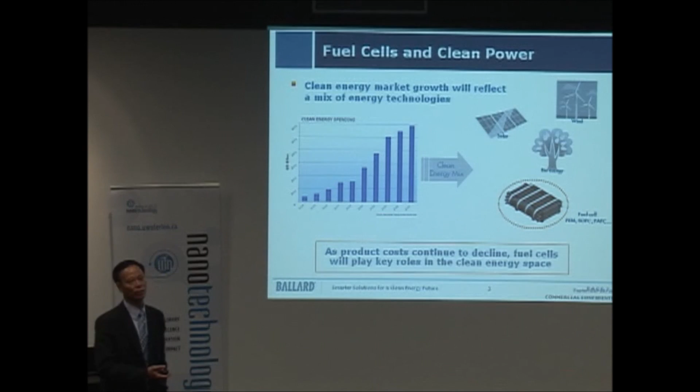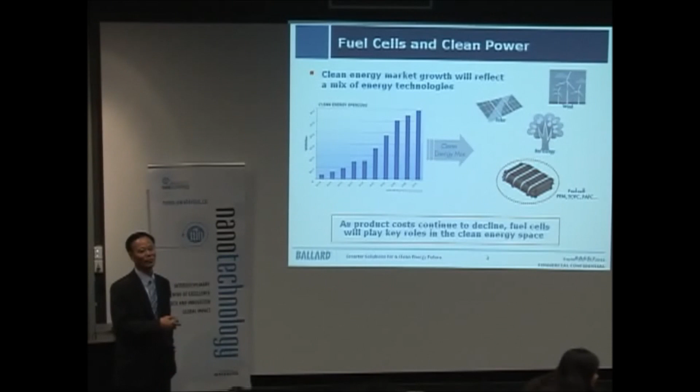Talking about fuel cells, we have to think about how that's directly linked to overall clean energy or clean power. We know the clean energy market has grown significantly, particularly in recent years. That's a mix between many different areas, not only fuel cells, but also solar, wind, bioenergy, and of course battery. We believe with continuous product cost reduction of fuel cells, fuel cells will play a more important role, or I should say a key role, in the clean energy space. The reason is because solar and wind energy will get an advantage from using fuel cells, and fuel cells will get an advantage from them to generate the hydrogen fuel we want to use.

So then, what is a fuel cell? This is mostly for those people who aren't familiar with fuel cells at all.

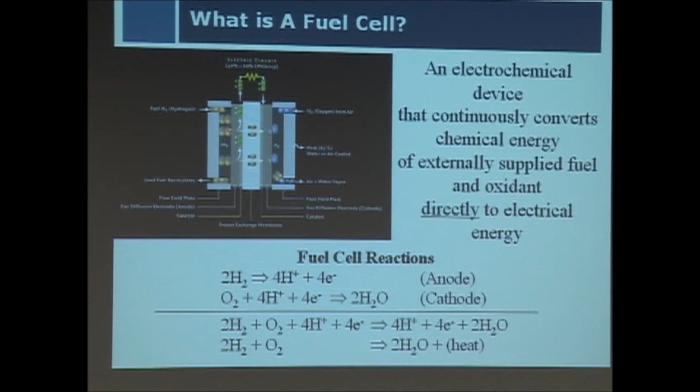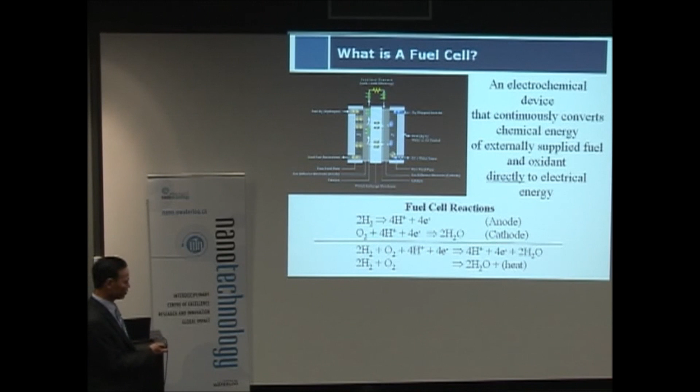Fuel cells are electrochemical devices that continuously convert chemical energy from an external supply of fuel and oxygen directly to electrical energy. They have two reactions: at the anode, hydrogen reacts with a catalyst to form protons and electrons, which go to the external circuit and react with oxygen, mostly from air, to form water. So the overall reaction is hydrogen plus oxygen generates water, heat, and electricity. There is no other side product that is not good for our environment.

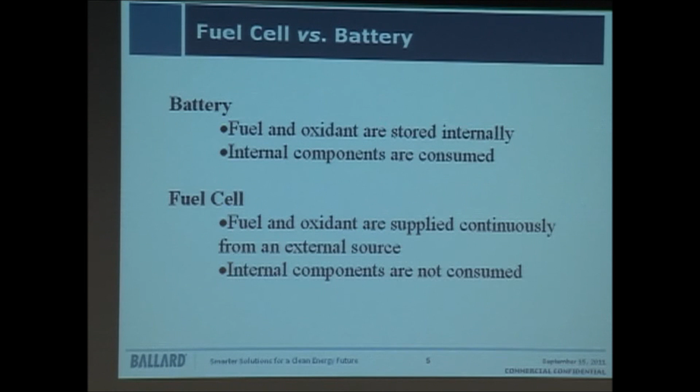I want to use this slide to compare fuel cells and batteries. For batteries, both fuel and oxidant are stored internally, and when you charge or discharge, the internal components get consumed and then restored when you charge again. However, for fuel cells, both the fuel and oxygen are supplied externally, so you can continue operating as long as you have enough hydrogen and air supply, and the internal components are not consumed at all.

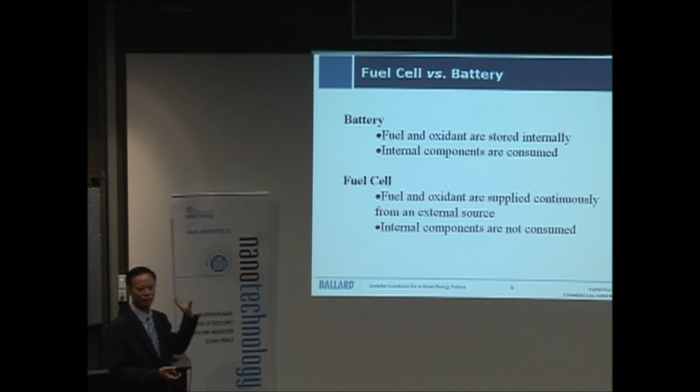Many people think fuel cells and batteries compete with each other, but I really think they are complementary, even including supercapacitors. These three electrochemical devices actually help each other in more ways than they compete. So from a technical point of view, we think these three devices are friends - they don't compete, they help each other.

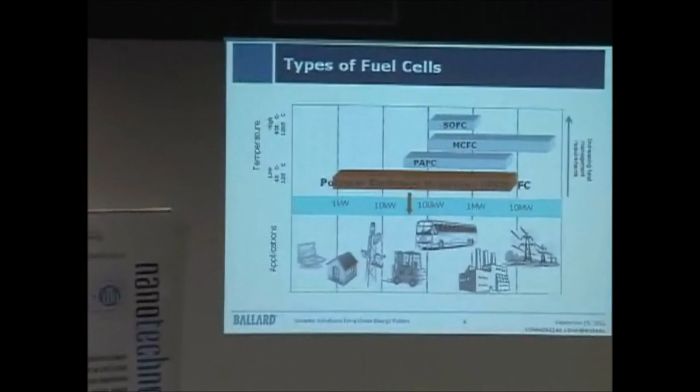There are many different types of fuel cells. At Ballard, we only work on proton exchange membrane, also called polymer electrolyte membrane, PEM fuel cells. This is different from solid oxide fuel cells, molten carbonate fuel cells, or phosphoric acid fuel cells. Another one not listed here is the alkaline fuel cell. PEM fuel cells can work across a wide power range, from sub-kilowatt up to megawatt range - from laptops or small house cogeneration, to telecommunication backup, forklifts, buses, and distributed energy generation.

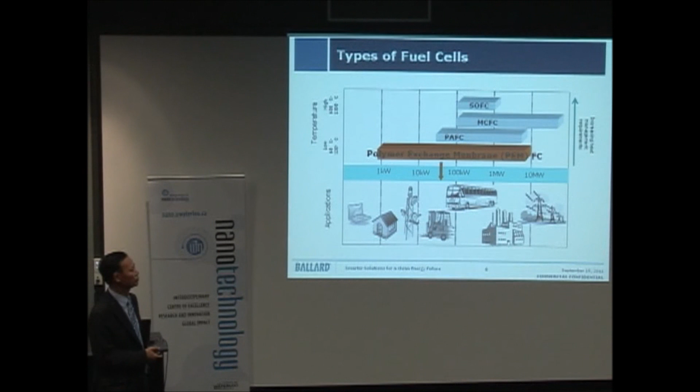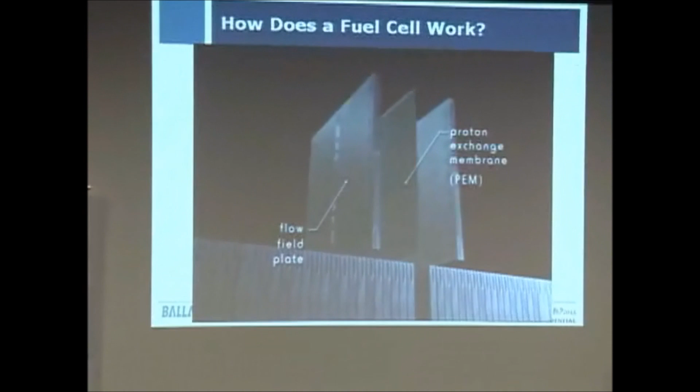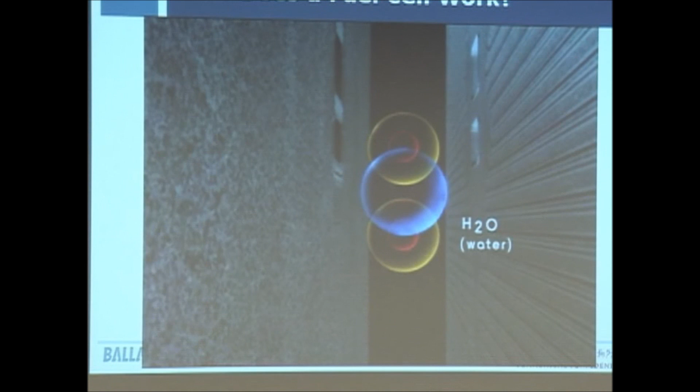I want to show how a fuel cell works. The fuel cell has flow fields on both the anode and cathode sides. Hydrogen, from either methane or natural gas reforming, comes in on the anode side and generates protons. The proton goes through the PEM membrane, and the electron is consumed by the external circuit, generating electricity, then flows back to the cathode side and reacts with oxygen from air. The proton also passes through the membrane, generating water as a byproduct.

To make the fuel cell work for different voltage requirements, you can build a fuel cell stack, basically stacking together many single cells. That's one of the key advantages of using a PEM fuel cell - depending on what power range you want, you can either change the number of cells or change the surface area of the electrode to get the power, current range, cell voltage, or stack voltage you want.

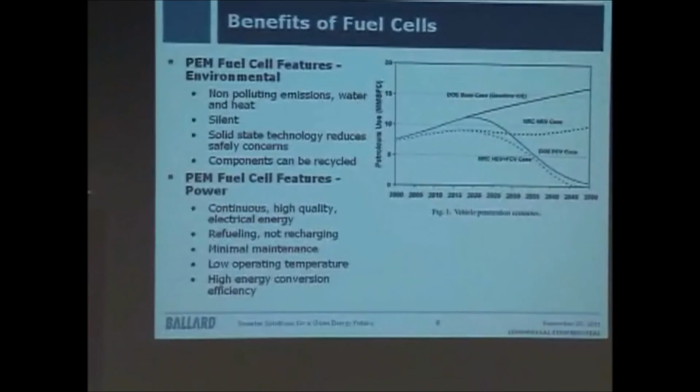So what's the benefit of fuel cells? We have to talk about vehicle penetration scenarios that people have predicted. Although many years of progress have continued to reduce greenhouse gas emissions from current cars, our population will continue to increase, so overall petroleum use will continue to increase. With continued improvement in fuel efficiency through vehicle emission control, it's never enough to even maintain or decrease fuel emissions or petroleum use.

With batteries, such as hybrid cars or others, you can stabilize things a little bit, but with continued population increase, it cannot be maintained or decreased anymore. So only the combination of fuel cell cars, or fuel cells hybridized with electric cars, gives you the opportunity to continue reducing the use of petroleum.

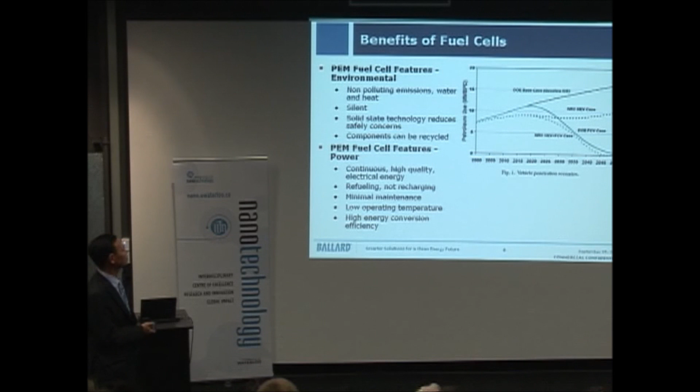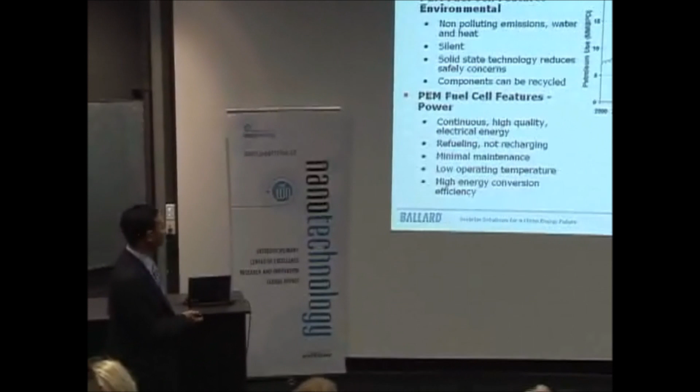That's extremely important for our future and future generations, because petroleum will continue to be consumed and will end up with nothing. So not only for that use, the environment benefit for pollution control and others also needs help by use of this fuel cell. So the fuel cell benefit is not only for environment benefit, it's also for our sustainable energy requirement.

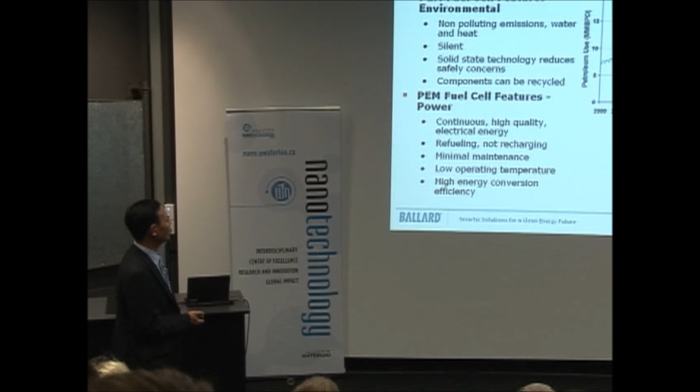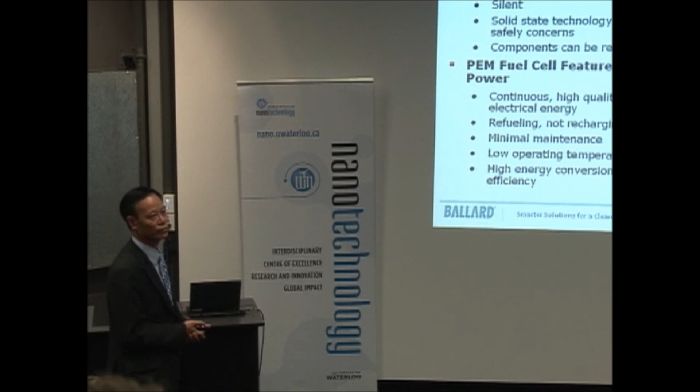And also in addition to that, there's a technical reason to use fuel cell. First of all is feature power, since we can continue to provide high quality electric power, and refuel when you need, like our current standard car uses gasoline, not necessarily recharging. We also need very minimal maintenance because we don't have too many moving parts within the fuel cells, and relatively low operation temperature compared with other high temperature operation, so it's mostly around 85 degrees C. And the high energy conversion efficiency, particularly compared with internal combustion engine.

Because of those benefits, the fuel cell has been applied into many different fields. Some of them have already shown not only environmental benefit, they've already shown economic benefit. So we classify the application of the fuel cell into three main territories.

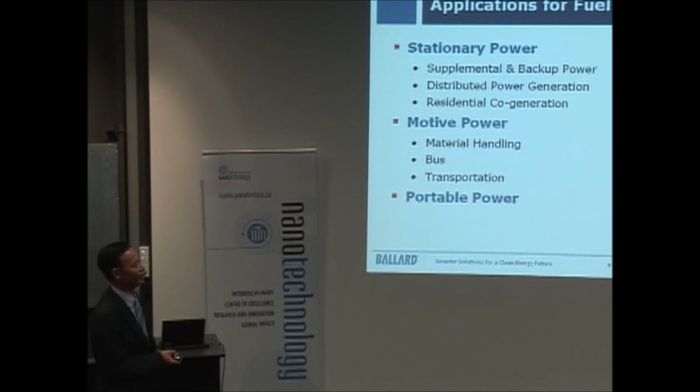One is the stationary power. In there, they include supplemental power and backup power. The difference between supplemental power and backup power is only when you need it, you use it. That's more like APU start, so maybe running for minutes or hours.

However, the recent Japanese nuclear power problem shows that usually battery-based backup power becomes unreliable, because I was told that it's not the hydrogen pump, the cooling pump problem, it's a backup power problem that made the cooling pump not start to deliver. So in that time, the backup power will become supplemental power, running for hours and hours. Battery cannot do that, but as long as you have hydrogen in that environment, fuel cell can do it.

That's actually the reality for many developing countries like India. They treat this as a supplemental power, not really backup power. And distributed power generation, that is initially mostly for areas where you don't have to build a long pipeline or electric power grid to provide power for those remote areas. But it's also important for those areas, you can generate hydrogen as a waste, like in the chlorine alkali industry.

You have to burn that because of a safety issue. So you can use that waste hydrogen as your fuel resource to generate high quality power, particularly for peak power applications. So you balance all of your power with a very low cost.

Third one, residential cogeneration. As we say, fuel cell generates not only electricity, but also hot water as another side product. So you can combine this electricity and heat to provide your small home with both electricity and hot water. By combination of these two, you can get your overall fuel efficiency over 85% easily.

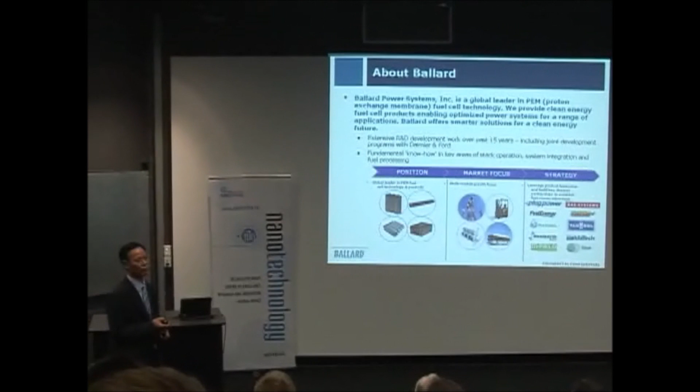Since 2007, we split our automotive focus - we split to them and were purchased by Daimler and Ford, and set up a new company called Automotive Fuel Cell Corporation, AFCC. Actually, we still share the same building and lab together. So not only on this research and development, because we have many years of experience, we have know-how in some key areas like stack operation, system integration, and fuel processing. So we position ourselves as a global leader in both technology and product.

So we mostly focus on multi-market growth, focusing on markets where we can generate revenue and retain it easily. To achieve that, our strategy is not to work alone, because no one company in the world can do everything by themselves.

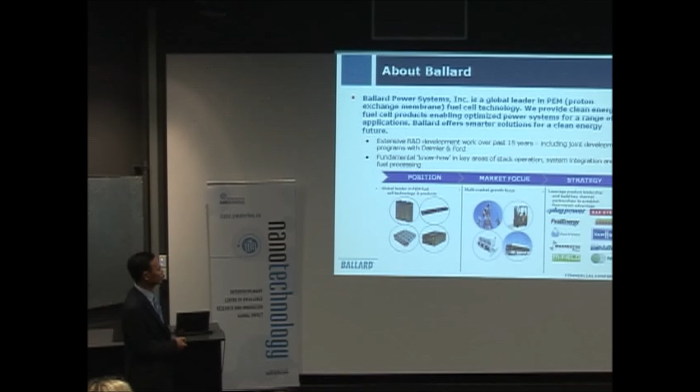So we work with many systems integrators together. For example, with Plug Power on material handling forklifts, with BAE Systems on hybrid bus systems, with Hitachi on backup and supplemental power, and with K2 Pure Solutions on distributed generation.

Our product portfolio ranges from very small, like this 1020 ACS, which stands for air-cooled stack. That one has a lot of benefits to simplify the overall system, because we don't need a humidifier, and air functions as both reactant and coolant, making the system extremely simple, so many people can take that immediately and use it.

For others, this one is mostly for distributed power generation, this one is mostly for material handling, and this one is mostly for bus application.

We not only build the stack, we also build the module, which includes most of the gas and water, even the control system inside. So we go from the stack and the module up to the system, working both with others and by ourselves.

This particular one is called Dantherm. This is a company we purchased from Denmark, Dantherm Power, and now they generate the whole system with us as part of Ballard. So Ballard's product portfolio is not only fuel cell stacks, but is also extended to modules as well as complete fuel cell systems.

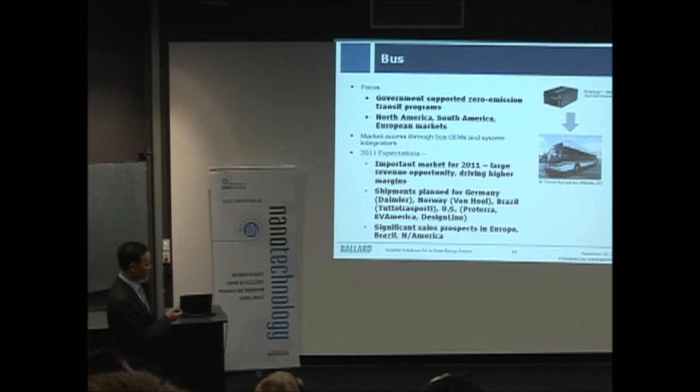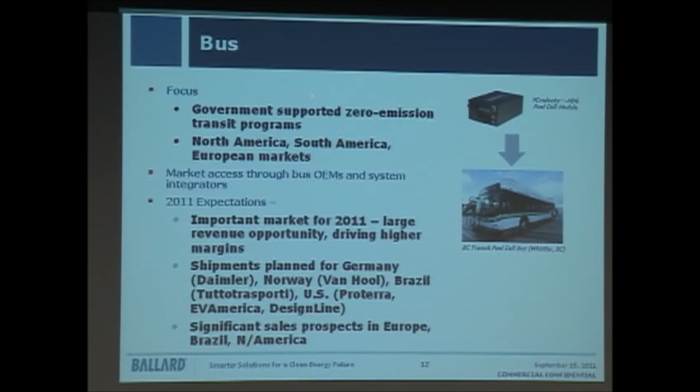So this example, I just want to talk about how we're working on the bus program. At this moment, our bus program still heavily relies on government support, particularly not for our fuel cell stack and module, but mostly to build the infrastructure so the fuel cell buses can run. That's mostly supported by government.

And here's an example regarding fueling infrastructure. I always say, Ballard only makes the car, we won't build the highway. So that's something we rely on government for, to make this infrastructure. We also work with bus OEMs and system integrators together to make this fuel cell high efficiency and cost effective. This is one example.

So we expect to continue growing this market because it shows a lot of interest from other system integrators and also different areas like Europe, Brazil, and North America — they all have demand for the fuel cell bus.

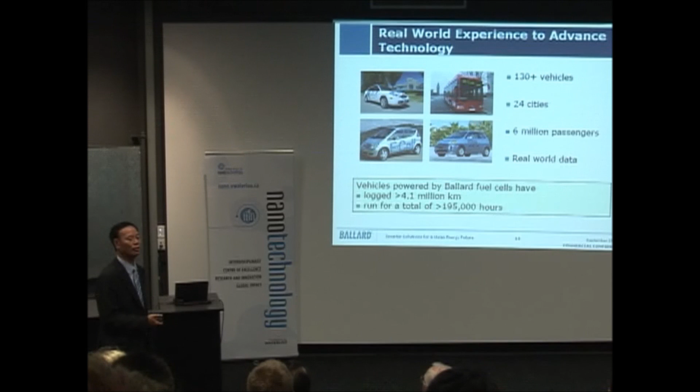Although Ballard split our car or automotive business to AFCC, Daimler and Ford in 2007, we do have a very long history and experience in fuel cell stacks for cars. That's where most of our real world experience comes from. That real world experience helps us significantly improve our next generation products, because failure modes and other issues give you guidance on what you lack in the first couple of generations.

Ballard has provided more than 130 vehicles, but that's before the AFCC split. We still provide stacks to AFCC to build the current generation Daimler Ford car. At that time, this number of fuel cell stacks on cars was more than the combination of any other fuel cell stack supplier in the world.

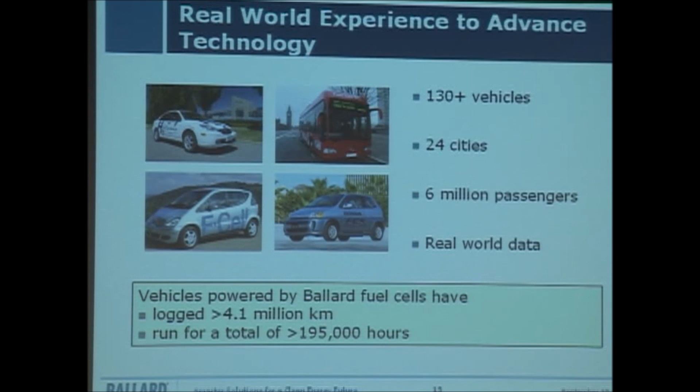We've been running in 24 cities, and more than 6 million passengers have taken our cars in that time. We already accumulated more than 4 million kilometers and close to 200,000 hours of operation. That's real world experience and data that gives us a lot of guidance for our future development.

Before I move to the more technical side, any questions?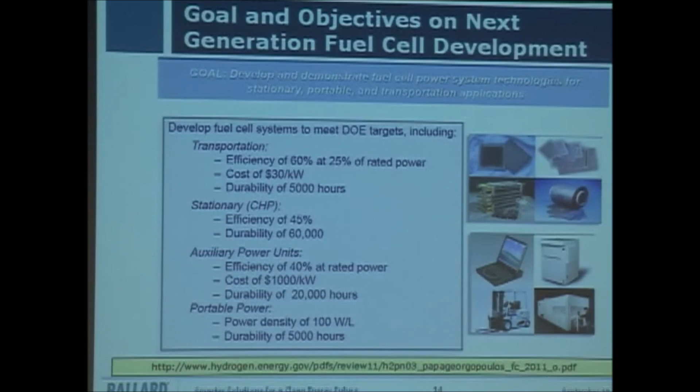Okay, so I'm talking about the current, more recent development and future direction of fuel cells. We need to talk about our goal and objective for next generation fuel cell development. The goal looks simple: you must develop and demonstrate your fuel cell power system technology for stationary power and transportation applications.

However, when you go into more detail, you find it's extremely difficult for many different reasons. Number one, we compete with a very mature internal combustion engine. They have more than 100 years of experience, and they have improved significantly in that time.

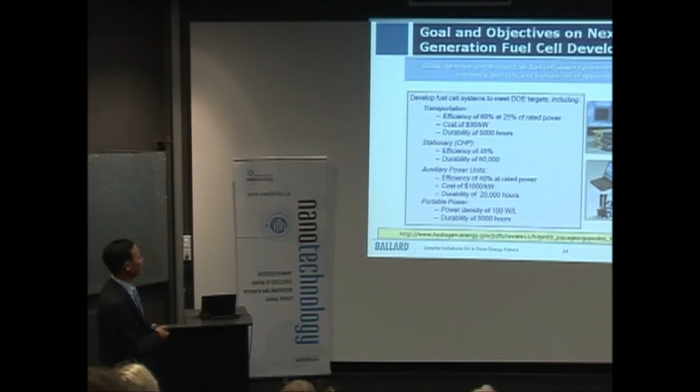We have to get our fuel cell product as good as or better than internal combustion engines. We have to demonstrate higher efficiency, get our costs down to equal theirs, and demonstrate durability equal or better than theirs. For stationary power, we also have to demonstrate better efficiency and durability as good or better. It's the same for auxiliary power units and portable power.

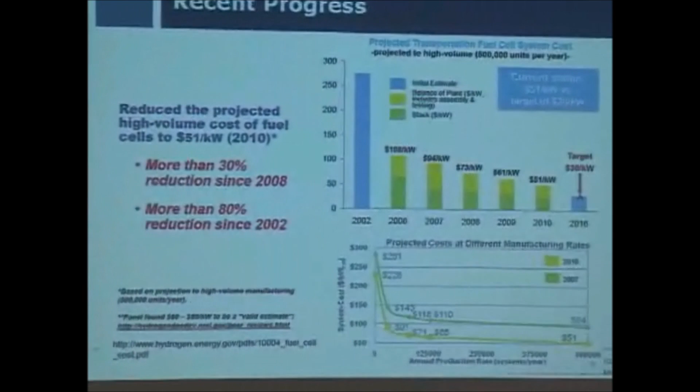So from there, maybe you can see significant requirements are still needed. However, recent progress indicates a lot has been made toward the 2015 DOE cost reduction goal. We have more than 30% cost reduction since 2008. Counting from 2002, we've already achieved more than 80% cost reduction. That is great progress.

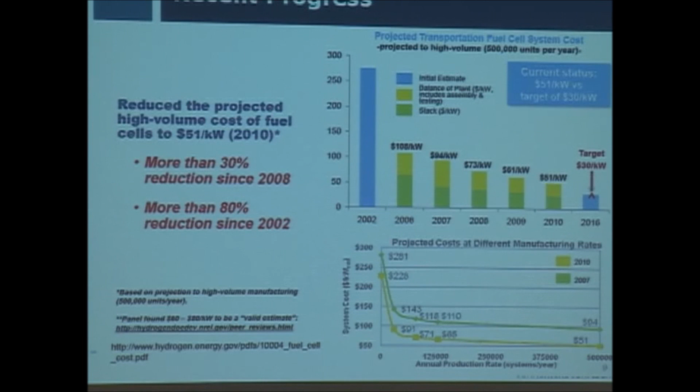Although to get to this 30 dollar per kilowatt target we still have a long way to go. If you're talking about the overall system and stack cost reduction goal, most of it is projected based on high volume production. If we still maintain low volume, it's extremely difficult to achieve that overall system cost reduction.

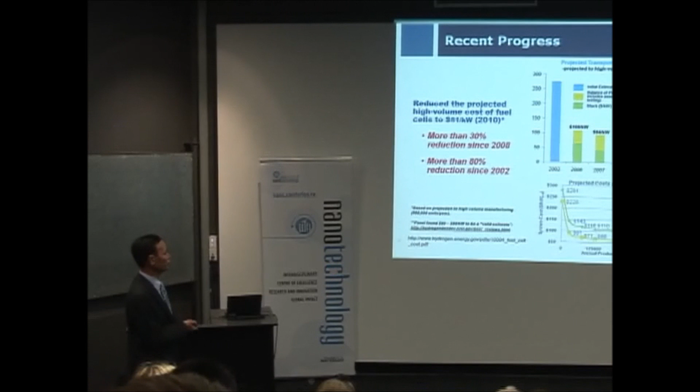So sometimes we keep pushing fuel cell cost reduction - yes, we still need it - but without the help of overall high volume, it's extremely difficult for us to do so. If we achieved high volume today, we might already have many of the things we want.

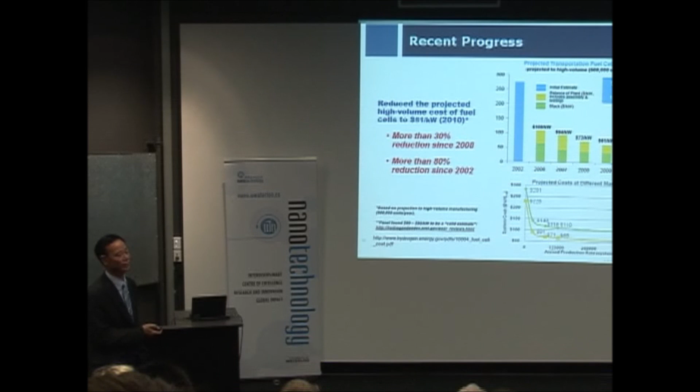So from there, you can guess what the key challenge is for fuel cell development. From here, I'm mostly talking about the technical challenges for fuel cell commercialization. Again, to repeat: fuel cells, as in a car for example, have to compete with the most mature internal combustion engines under all road conditions they experience.

You cannot just test under ideal road, ideal conditions. It also has to work everywhere - not only in BC, in Waterloo, but maybe in the North Pole or desert areas, cold or warm. It has to be freeze startable, and everybody can use it anytime. So we don't only target city drivers, we target real world applications.

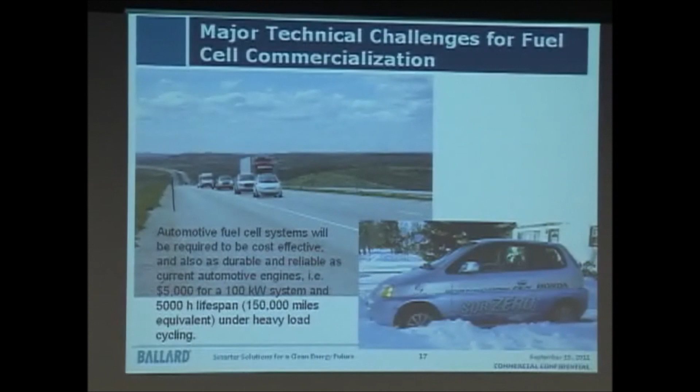So as I already discussed, you definitely need it to be as cost effective and durable as current internal combustion engines. From there, maybe you can easily conclude that cost and durability are the major challenges to fuel cell commercialization.

Within that, there are many different fuel cell components I've talked about before, and catalyst and membrane are the two main contributors. Since I'm more of a catalyst guy, I won't touch on membrane, so the rest of the focus will be on catalyst. What is a catalyst - sometimes we call it electrocatalyst, because in fuel cells it actually is an electrocatalyst.

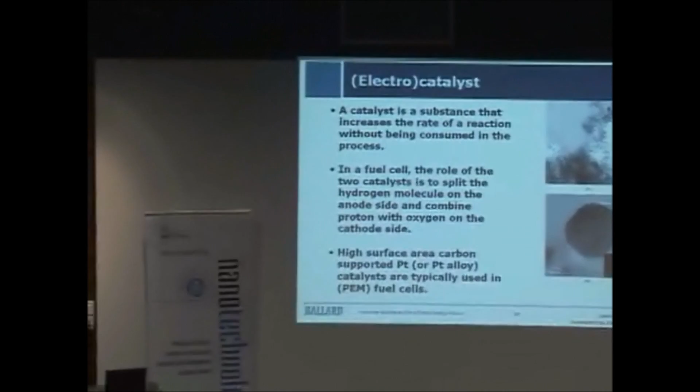By definition, a catalyst should be a substance that increases the rate of reaction, but itself should not be consumed in the process. In the fuel cell, there are two catalysts: one is at the anode, to split hydrogen into protons; the other is at the cathode, to reduce oxygen to water.

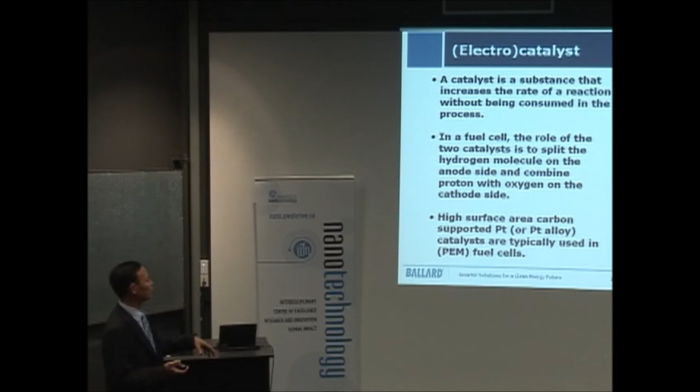Since typical catalysts use noble metal platinum or platinum alloy, we have to use that effectively. We normally use high surface area carbon as a support to make the platinum disperse well. In this case, we can reduce the use of platinum and get more cost effective catalysts.

However, the challenge is there - if we use platinum as our key catalyst, in the last 15 years the platinum price has increased dramatically. Our platinum loading reduction hasn't been as great as that price increase, so that's a big challenge for us to maintain cost. I'm just using the current platinum loading. So continuing to reduce platinum use in fuel cells is definitely challenge number one for us.

The second challenge is that even with good catalysts using platinum, they still degrade in the fuel cell environment. Particularly the carbon support, as I mentioned before, will be corroded. The reason is that during fuel cell operation, we have start up and shut down from time to time, and in real world experience you can't always protect it with hydrogen.

Hydrogen has to be emitted after you shut down your engine for safety reasons. So when you restart, both the anode and cathode side will become air-air. For that air-air start, you basically change your fuel cell environment, so one side is air, another side is hydrogen plus air.

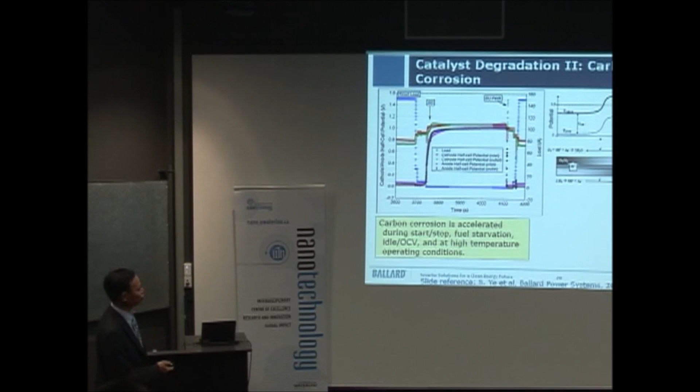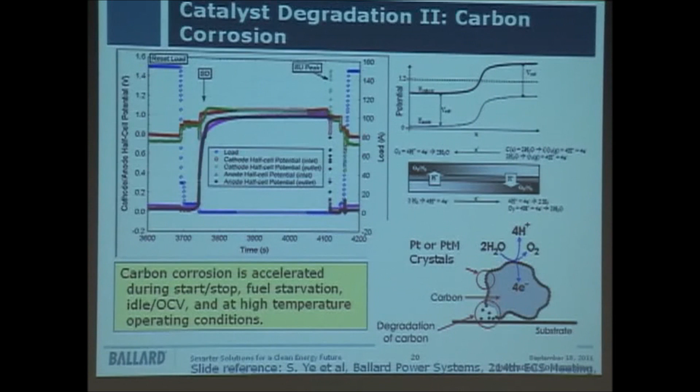One example is that when the carbon corrodes, the platinum or platinum alloy catalyst will also dissolve and even leave the carbon support. So for that reason, catalyst support stability is extremely important for us to maintain our fuel cell performance over a lifetime.

Second, platinum itself will have decreased surface area during operation. As I mentioned, the catalyst is not supposed to consume itself during the fuel cell reaction. However, in the fuel cell environment they do consume themselves because of our acidic environment, oxygen, and high potential. All of this makes the noble platinum catalyst become more or less dissolved and oxidized, and it migrates to the membrane, contributing to our overall performance degradation.

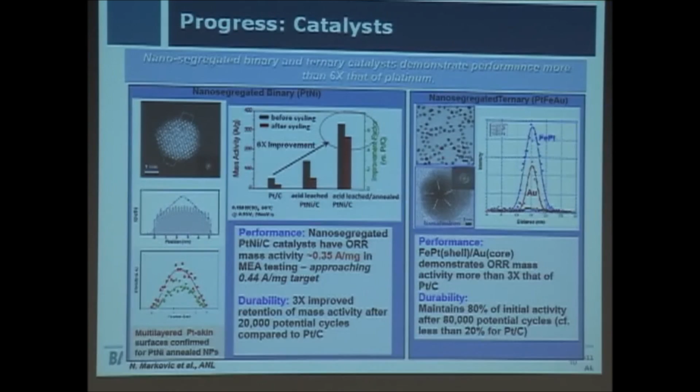The good thing is, in the last couple of years we made great progress on catalyst performance and durability improvement. One example is from Argonne National Lab, where they use a nano-segregated binary catalyst. They claim a 6 times improvement in activity compared with platinum.

Particularly if they combine with iron and gold as a ternary catalyst, they also have an opportunity to improve not only activity but also durability.

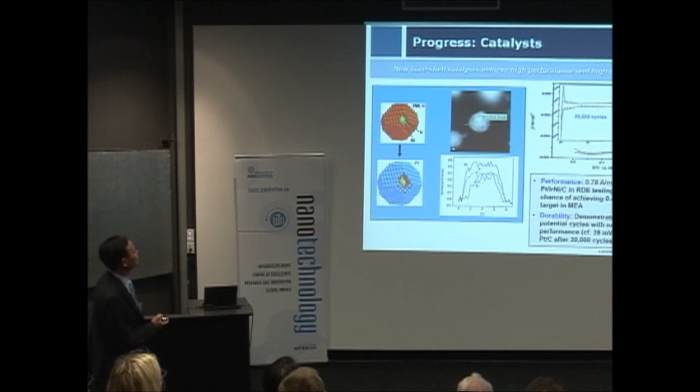Another example uses this core-shell catalyst. I particularly chose ones mostly related to nanostructure catalysts. They also have the opportunity to continue reducing platinum usage because they have a 4 times improvement for mass activity, and they also demonstrate extremely good durability.

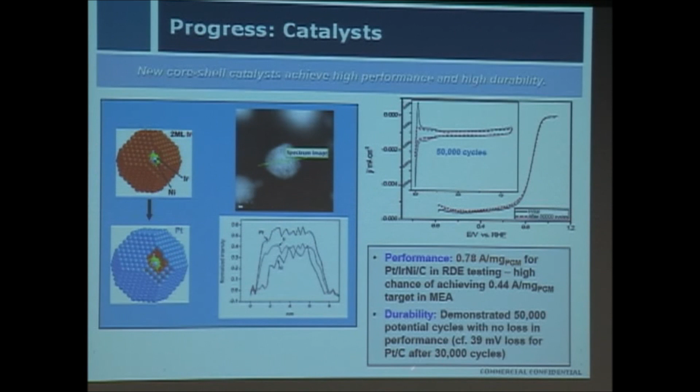For example, with 50,000 potential cycles, mimicking a start-stop of the car in the real world, there's almost no performance loss. However, if you use the existing carbon-supported platinum catalyst, even after 30,000 cycles it's already close to 40 millivolt performance loss.

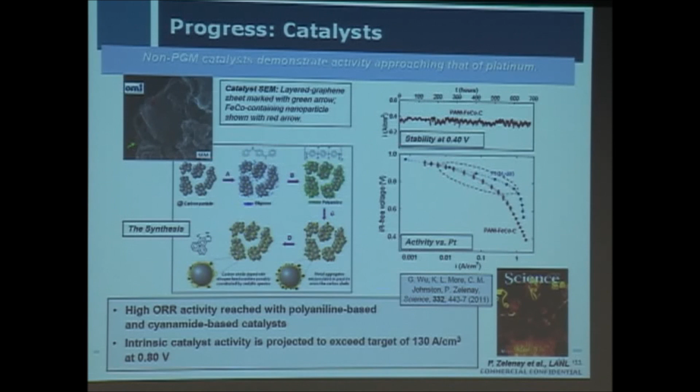At Ballard, we also demonstrated in 2007 that we can achieve 5,000 hours of operation, equal to 105,000 miles equivalent, with no more than 5% performance degradation within those 5,000 hours.

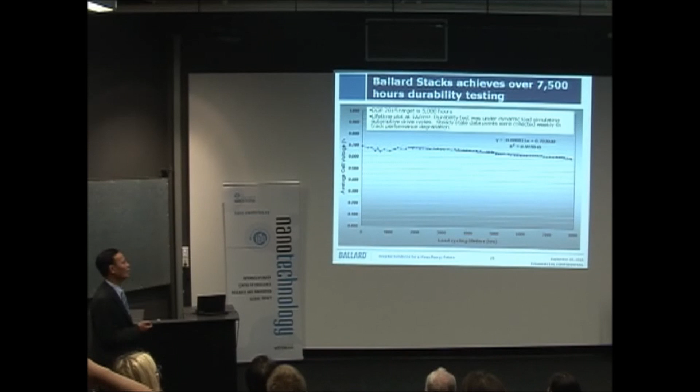But this is at 1 amp per square centimeter, which is real world needed power, not just the mass activity tests based only on 0.9 volt. So we do have the opportunity to get the durability we wanted. However, that is based on relatively higher platinum loading, not something we want as per the DOE 2015 goal. That's the reason why we think we need more work on that.

After that, we did some failure mode analysis. We understand that catalyst layer thinning and corrosion, membrane damage, and platinum dissolution are the key contributors to this performance loss. So from there, we want to talk a little more about catalyst support.

As I said before, to make platinum or other catalysts more cost effective, we have to disperse them, so we need to use a catalyst support. For catalyst support, we really want some ideal or desirable characteristics: for example, high surface area, porosity, chemical and electrochemical stability, mechanical stability, and a certain physical form that is maintained during fuel cell operation. And of course, we want high conductivity.

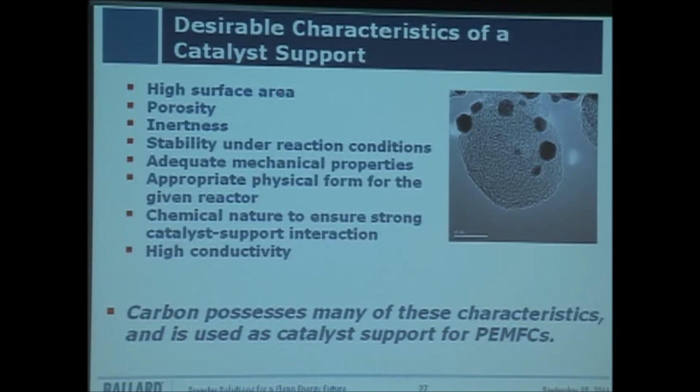Usually carbon possesses many of these characteristics. That's the reason it was used as catalyst support initially and is still mostly used as the fuel cell catalyst support for production. However, it does have some disadvantages we'll talk about later on.

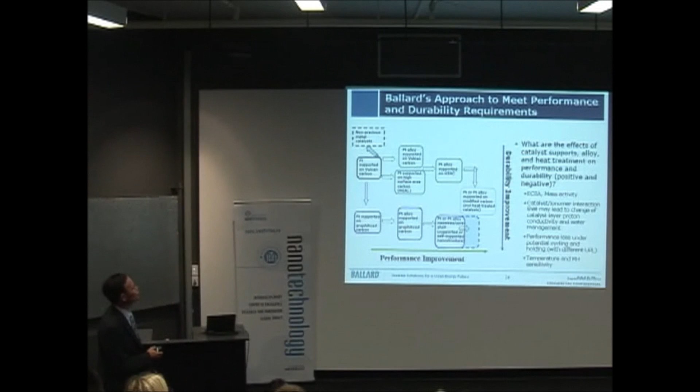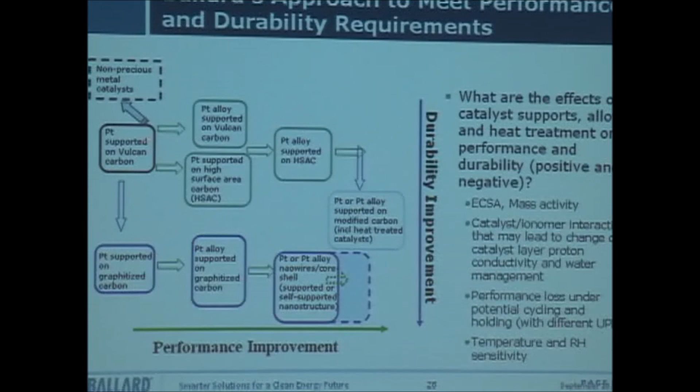To meet those performance and durability goals, Ballard's approach is as follows: we definitely want to go eventually toward non-precious metal catalyst if that's workable. We actually started, like many other catalyst developers, with Vulcan carbon support catalyst, which is still used as a baseline catalyst by many people—universities, national labs, or even small startup companies.

However, when we put this as real-world application, we quickly found either performance or durability cannot satisfy our requirement.

So for durability-wise, we gradually changed this to graphitized carbon-based catalyst. Regular carbon changed to graphitized carbon significantly improved the stability, and we continue working on that to make the performance improvement.

At the same time, we also changed to platinum alloy catalyst, either on the same carbon or using a high surface carbon to further improve performance. For both ways, we want to go to durability this way, performance this way. It's a little bit difficult to do either of them.

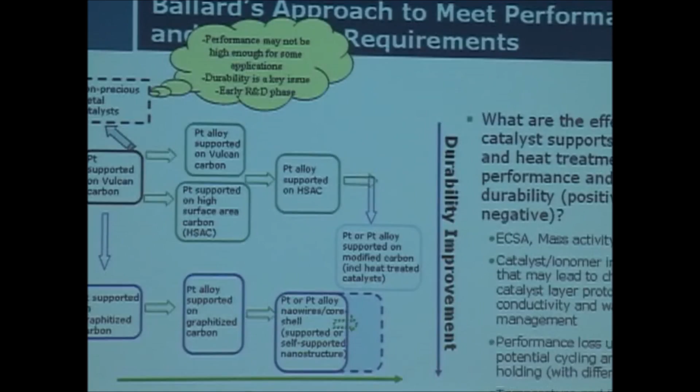So although I showed before some great progress on non-precious metal catalysts, the performance is still not good enough for real-world application, and durability is also an issue. So we classify this still as early R&D phase.

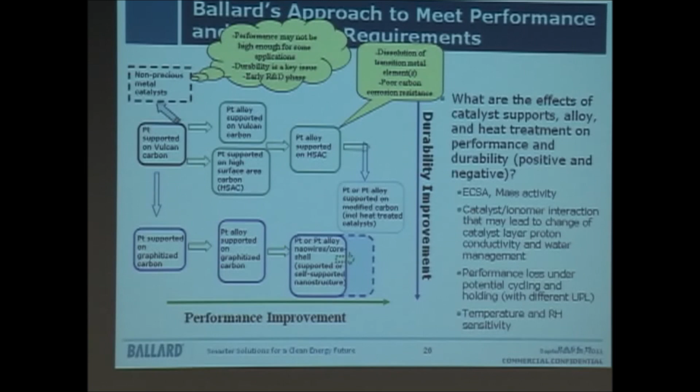For this alloy support on high surface carbon, yes, they do show some great performance improvement. However, those transition metal dissolution is still a key challenge for the real-world application. Those high surface carbon also didn't show good enough corrosion resistance.

Our ultimate goal is to go to here. We don't know what it is yet, so we want everybody here to help us get the performance and durability we wanted.

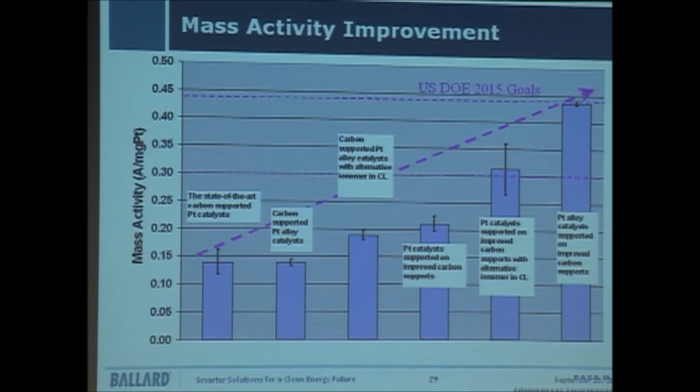So for performance-wise, with existing technology in combination with many ways, like alloy catalyst, different support, even changing ionomer in the catalyst layer, or the combination of all of them, we do demonstrate we can get this mass activity in small scale tests to reach this DOE 2015 goal.

So this is also achieved by combination of many ways, not only catalyst material but also the catalyst support. Choosing catalyst material is important, but understanding their interaction is also key to getting the durability improvement. And of course, catalyst layer composition is extremely important to maintain or enhance your activity.

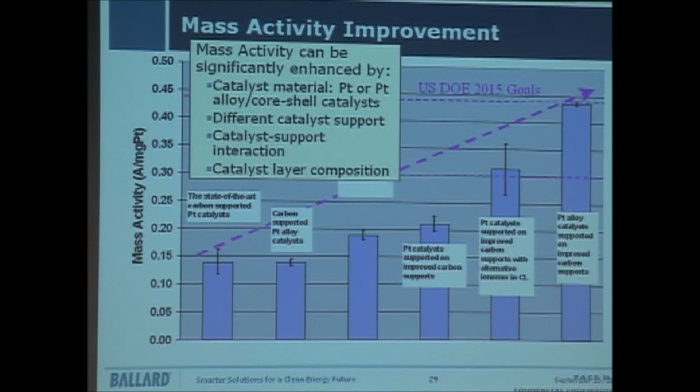However, we still didn't get the durability we want, particularly when we continue to reduce our platinum loading to the cost-effective way. So we have to work on some further improvement.

So talking about carbon chosen as the catalyst support, it has reason because it has many good characteristics. However, when we go to detailed analysis, we found some of the characteristics of a carbon support actually conflict with each other.

For example, carbon functional group. That is really good when you disperse the platinum onto it, because those functional groups function as an anchor site to make the platinum attach there. So you can get very good dispersion of platinum, and also because of that you improve the platinum support interaction.

However, most of this functional group is oxygen-containing functional group. So when they stay there, it's relatively easy to be further oxidized to carbon dioxide. So in this case, that is bad, and that degrades faster. Another issue is, okay, carbon is not good, how about graphitizing it?

So make this like graphite. That's great, you significantly improve the graphitization, so that means corrosion resistance improves. However, when you make this more graphitized, you make the surface more inert.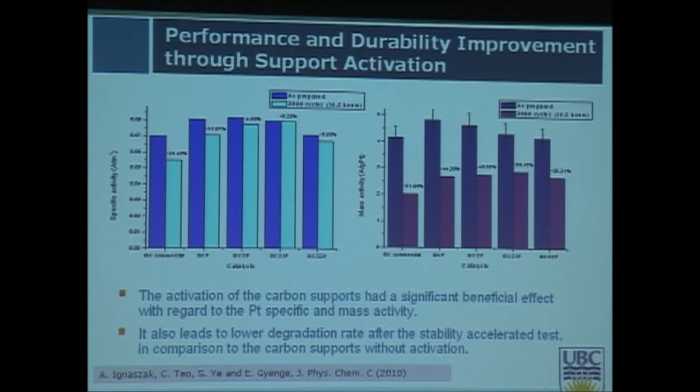I think this has been demonstrated in the stability accelerated test. We haven't had a real fuel cell test yet. That is still in progress.

So talking about beyond the conventional carbon, we have to think about using some non-conventional carbon. First of all is carbon nanotube. In collaboration with Professor Andy Sun from Western Ontario University, we initiated a collaboration project on nitrogen carbon doped carbon nanotube. Initially, when he talked about functionalized carbon nanotube, we immediately pointed out we don't want that type of functionalization, because oxygen is something we don't want. So nitrogen doping or any other type of doping might be something we want to try. For that reason, we chose nitrogen doping as a new functionalization method for the carbon nanotube.

Normally we worry that with any doping on this carbon nanotube, the electric conductivity will be an issue. Very fortunately, we got improved electric conductivity and at the same time improved platinum dispersion.

Comparing this with conventional catalyst using regular functionalized carbon nanotube, we get some improvement in high current density, but no improvement at all in low current density. The high current density improvement is mostly because of the structural benefit of the carbon nanotube. However, if we use a nitrogen-doped carbon nanotube, we improve both low and high current density. That means we not only take advantage of the carbon nanotube as a structure builder, but also improve the platinum dispersion.

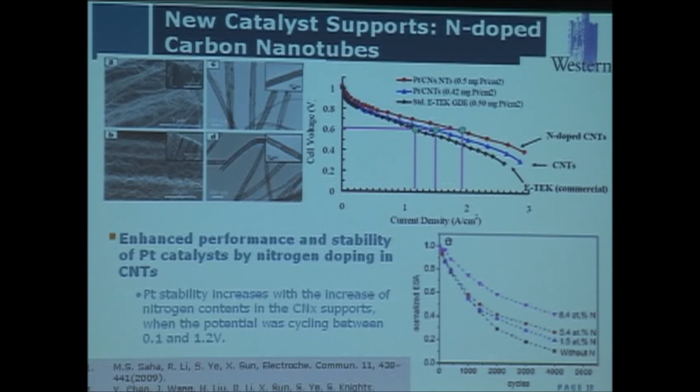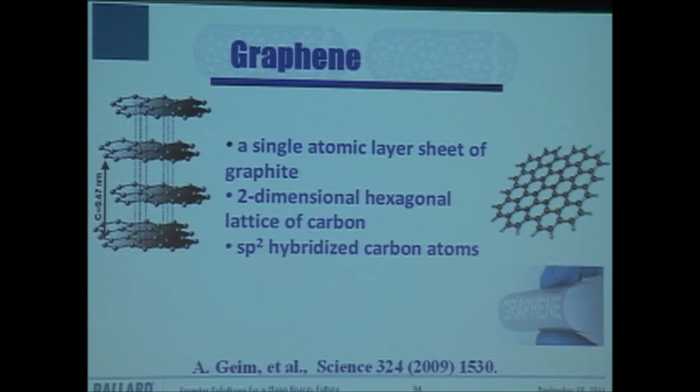Another area is graphene. I think in this institute, because it's nanotechnology, many people are familiar with this - a new type of carbon, a single atomic layer sheet of graphite, not like a carbon tube rolled together, so this is a two-dimensional material. Because the discovery by these two gentlemen earned the Nobel Prize, that indicates this is an area that could expand even more. There could be more interest in this area because it's still an under-discovered area. Many things still need to be discovered.

What's going on here? I think I shut down. Sorry for that. Oh, okay, understand it. High tech.

For the same reason as carbon nanotube, we don't want to start with plain graphene because the interaction with metal is extremely difficult. We start with nitrogen-doped graphene. In this case, we can maintain the same structure, however get dispersion. Before we go into that, we actually tried using this nitrogen-doped graphene alone, without any platinum, to see if that has any benefit.

This work was carried out, unfortunately, not in an acidic environment - we're in an alkaline environment. We do demonstrate, we show even better performance compared to platinum catalyst in alkaline fuel cell. Also interesting, under this accelerated stress test protocol that mimics a real world durability test cycle, we also show we have better durability.

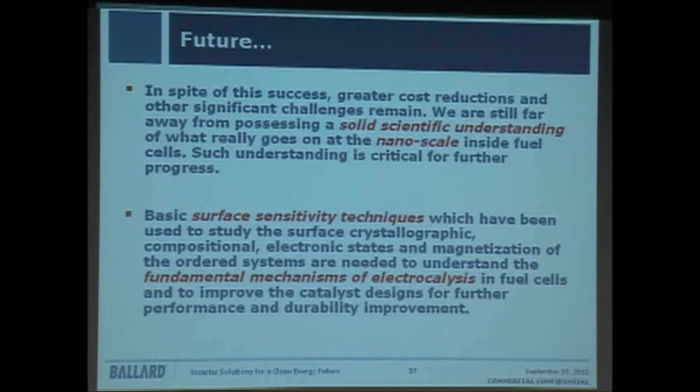That's very different than what common understanding of bulk properties. Those surface properties need surface-sensitive technology to understand. Most nanotechnology scientists and engineers already master this type of technology, so their understanding and tools will guide us to further improve our catalysts, hopefully for both performance and durability improvement.

So what should our next generation catalyst look like? As I said, our previous catalyst development was more like trial and fail and try again - more arts than science. We don't want to go that route again, because it's very time consuming and not cost effective, and we only end up with one solution for one particular application. That's not science. We really want to, from a nanoscale point of view, plan the sequence of either oxygen reduction or hydrogen oxidation at our reaction site, and have a targeted reaction for a wide range of applications - to do something, understand something, and design something.

So can nano engineering help us? Question mark - of course, at this moment, you can tell me. We also really need to understand the overall knowledge of catalysis.

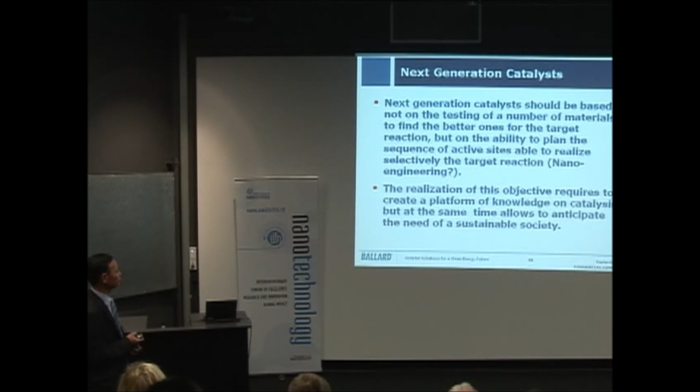At that time, we need a wide platform - not just one particular thing. We need people with that knowledge to help us build it. At the same time, we need help from the whole society to understand what our future sustainable society needs, so that when we make our next generation fuel cell, it already satisfies people's future requirements. It shouldn't be something where we later say, oh, sorry, we didn't know that was a problem.

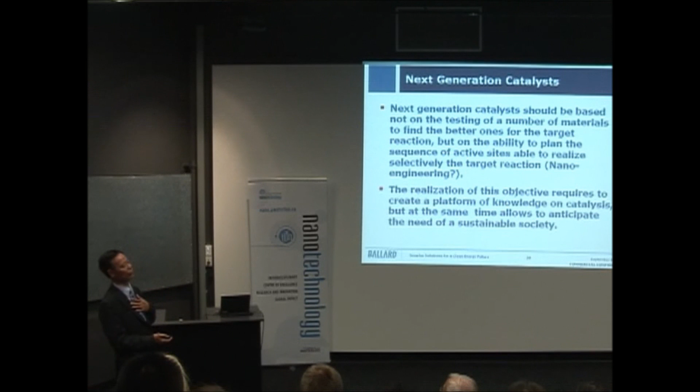For that, in the next two slides, I have a key example: catalyst structure-activity-stability relationship. We've made great progress on performance and durability using this catalyst and the next catalyst. However, we're still far from understanding how these are truly linked with each other.

This example shows that just one catalyst, treated under different temperatures, generates different types of ordered structure - one related to good performance, one related to good durability. Why? How can we manipulate this better to have both? Can any nanotechnology help us do that?

We want to demonstrate this in the real world to really show we understand it, so we can sell it to people with certain confidence. We don't want to give people a product and when they ask why, say 'I don't know why, we just made it.' So I really want nanotechnology research methods to tell us what's really happening there.

Not just from one XRD measurement where I know something because it's from this paper - any other technology that can understand the minor difference, because it's a very important difference between these two.

Another example is people talking mainly about core-shell structure. Initially, when we were working on platinum alloy catalysts, we quickly figured out those alloy catalysts would dissolve in our real-world environment. After that, the dissolved material generates what we call a skeleton-type structure. Although the top surface looks more platinum-like and more stable, those exposed areas to the outside mean the stability is still not good.

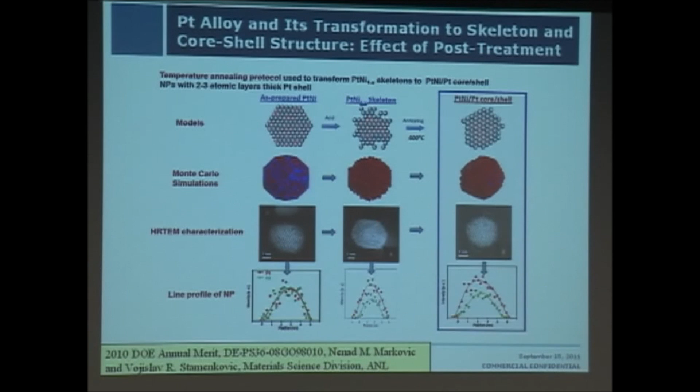When you continue to treat them, you can maybe generate a real core-shell structure, with evidence from characterization, so you get better performance. So how can we, from a nanotechnology point of view, finely tune this to make our core contain even less noble metal content, and our shell more stable than that? I hope nanotechnology can help us continue to improve it.

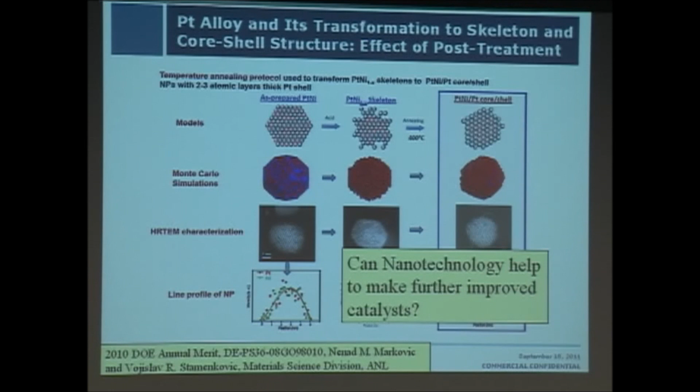Talking about carbon a lot - I think carbon has good advantages, but it also has disadvantages. So what about going into non-carbon support, or non-carbon support hybridized with carbon support? From there, I think there's a lot of experience from heterogeneous catalysis - they understand how the real reaction happens through the active site or through the catalyst-support interaction.

This uses gold nanoparticles and titanium oxide support as an example. From theory, modeling, and real experiments, they understand a little bit more in this area. Can those experts working on this help a fuel cell researcher understand more about the fuel cell reaction? My answer is definitely yes, but it's up to you to tell me how.

Other than the catalyst as a material, let me use one example: catalyst within the catalyst there - maybe we can use carbon nanotube, metal oxide nanotube, or metal nanotube.

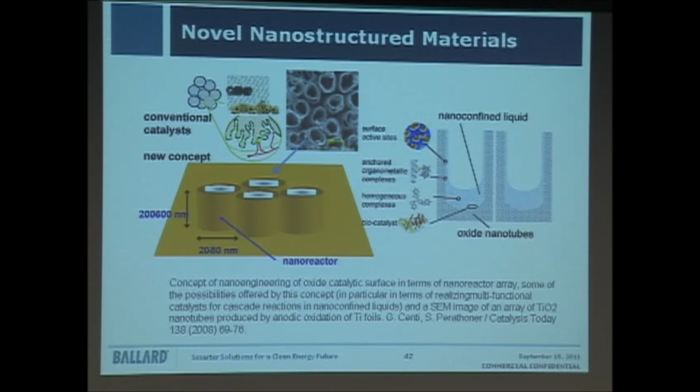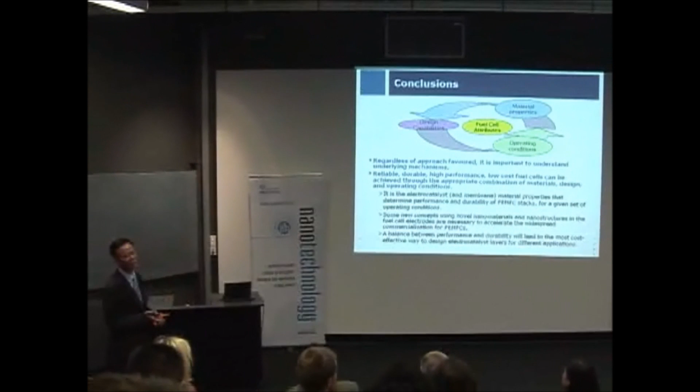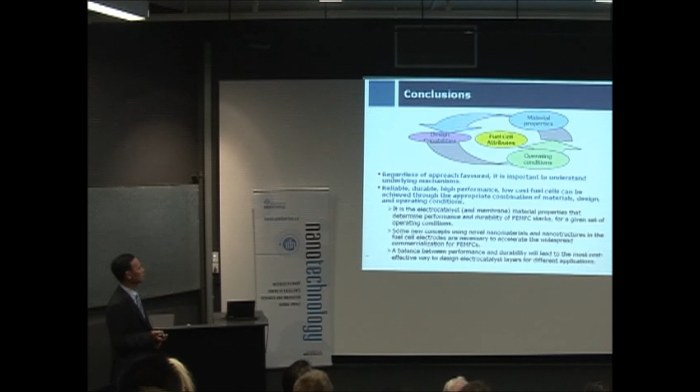Fuel cell catalyst research is truly interdisciplinary research and development. We not only need to understand what the fuel cell attributes need to be and understand material properties, we also need to understand our design capability and operation conditions. Only by completing this whole cycle can we really get a better fuel cell product in the future. To get that, of course, doesn't matter which way you choose, understanding the underlying mechanism is the number one requirement. So we believe reliable, durable, high-performance, low-cost fuel cells will be achieved, and that should be a combination of all three of these.

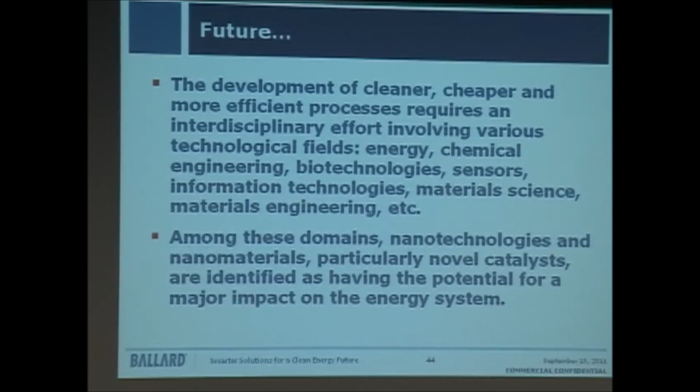Future development of a cleaner, cheaper, and more efficient process really requires interdisciplinary effort across a wide range of areas. But among those, nanotechnology and nanomaterials, particularly novel catalysts, will truly play a key role and heavily impact our future energy system. If you target global impact, high impact, I think that's one way we can learn from it.

What I talked about here is not only my own work, as many people contributed to this, not only from Ballard, but also collaborators Andy Sun from Western Ontario, and Elod Gyenge from UBC. So I think that's it. Thank you very much for your attention.